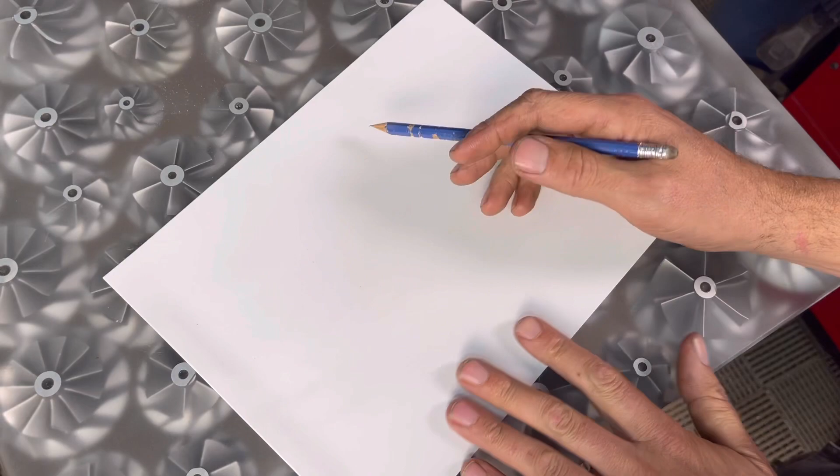Check out all their videos because there's a voting for the best fantasy knife at the end of this competition. So to begin this build, I like to do some drawings, maybe think of a design, something fantasy related. Let's get right into it. I have some paper here and I'm going to do some preliminary sketches to get an idea of what I want to make.

Now, when I think of fantasy, I'm thinking more futuristic, something that you might not see in a regular knife, or something more like what's seen in a movie, because they can digitally edit it and make things that cannot be made a reality to your eyes, basically.

So with that kind of thought, I want to make something that's kind of a dagger, probably a dagger type. The dagger seems to be one of my favorite types of knives. And I want to make it so something can come out — either I have a blade or something that can swing out, or maybe even a blade on the side that can fold in, or maybe even a bigger blade.

That being said, it would be a little complicated because there has to be some sort of mechanism inside that would help push those blades out. Now, I'm not even sure if I can do it — I'm just kind of getting my head wrapped around it.

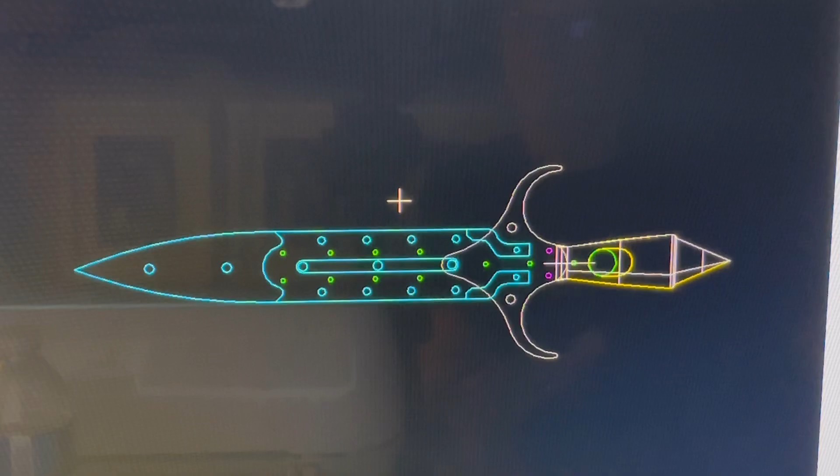If you look at it now, I have these in different colors here. Here's the handle, something I'm thinking about. The actual blade is going to be split in two because I need to put a mechanism inside there, and I'll just open up where the teeth are and the rack.

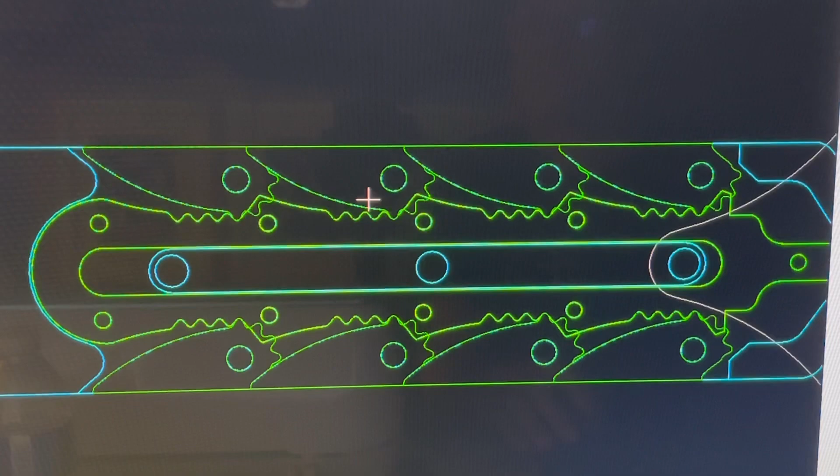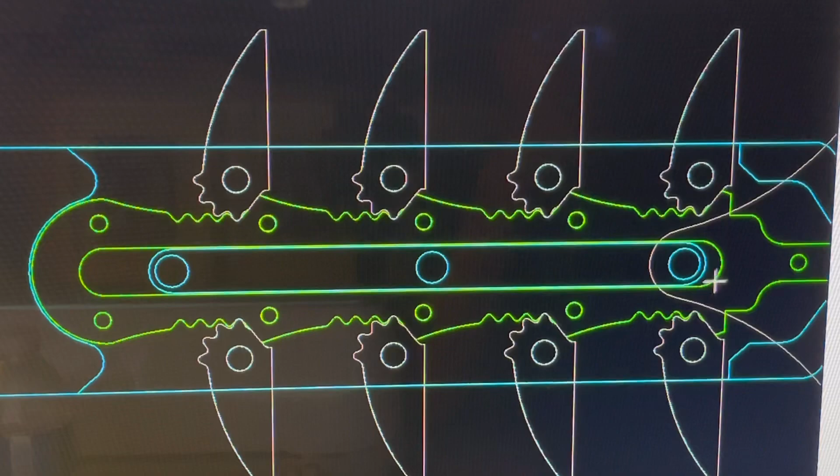Let's look at this mechanism here. You can see I have these gears, or teeth, that are going to make those teeth open and close. I'm going to just open up the right ones. Okay, there they are. So I have these teeth that once this mechanism gets pulled back, somewhere in the handle, or pulled forward, it's going to open up the teeth, and once pulled back, it closes the teeth, or the blades, these 8 blades that are on the side of the knife.

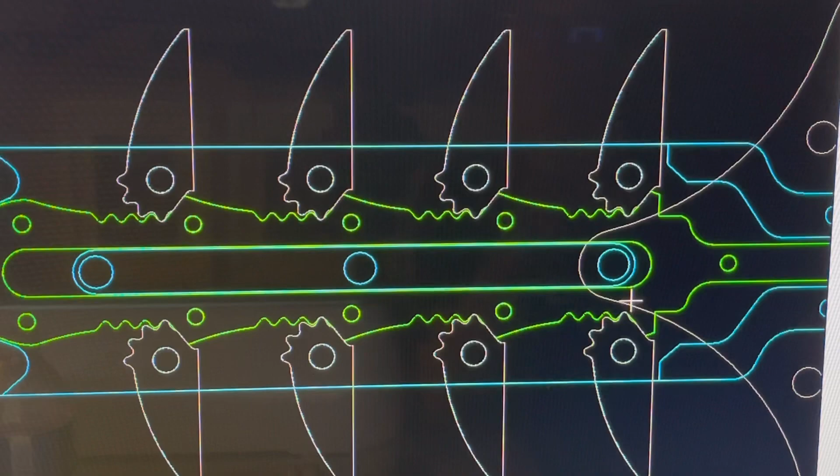Now they have to be thin. This rack that's holding it has to be pretty precise, because it's going to be operating all these gears here, so it has to mesh together. That's another reason why I draw it on here, and I can also take it all apart into different pieces.

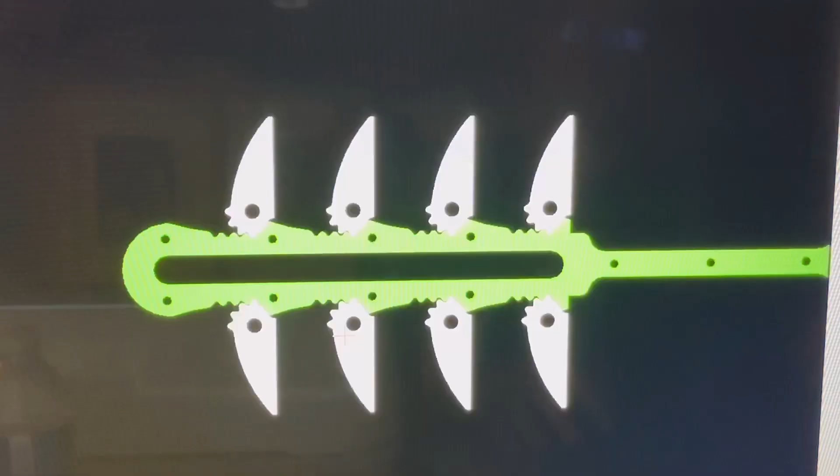Let me just show you, I'll take this off. So now it's in 3D view, and I can move it to a certain degree. I can scale it, and the best part is I can print it out and try it. So the first thing I want to do is make sure that the teeth and those gears are actually going to work when I open and close it. I'm going to print that first, and after that works, I'll print the whole mechanism and the knife together so I can have a good idea of how it's going to work and look.

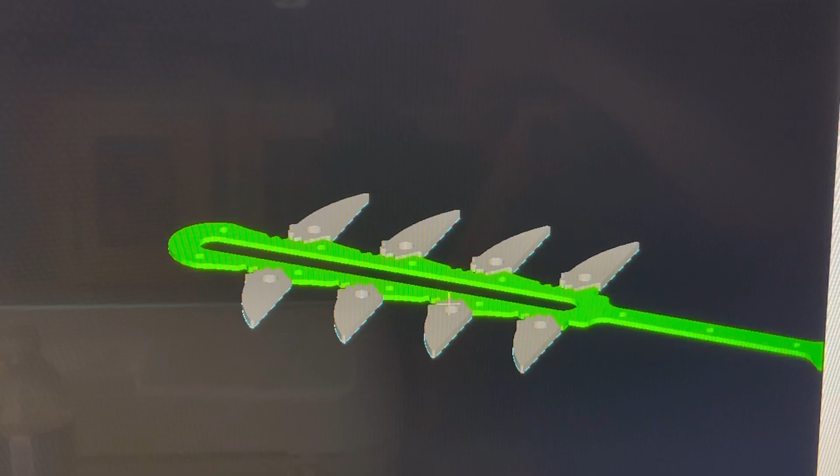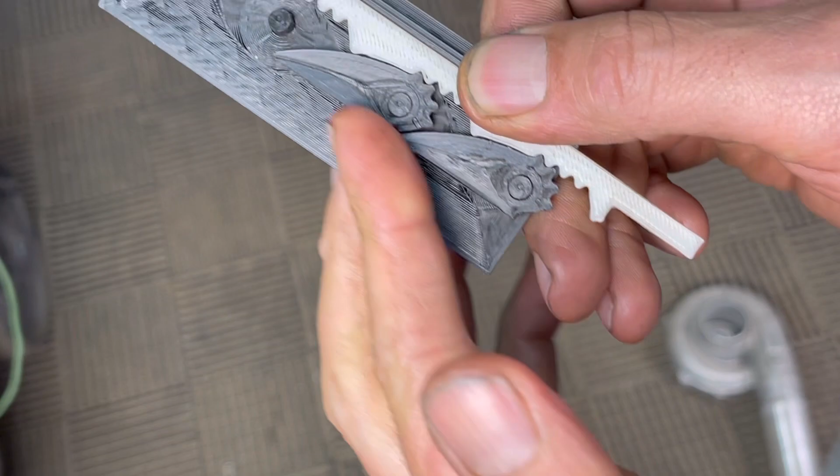All right, so this is the first print I made to make sure that the rack opens and closes with the teeth. It's basically just a simple design. It's going to close the teeth like that, so they will be along the side, nice and straight, hopefully. And when I push open, they actually lock into place, right inside there. So I'm hoping this is going to work. This print lets me know that the gears and the spacing and everything is going to work.

So now I'm going to print up a larger model, one of the whole knife and the blades inside, so I can use it as a template when I start making my Damascus.

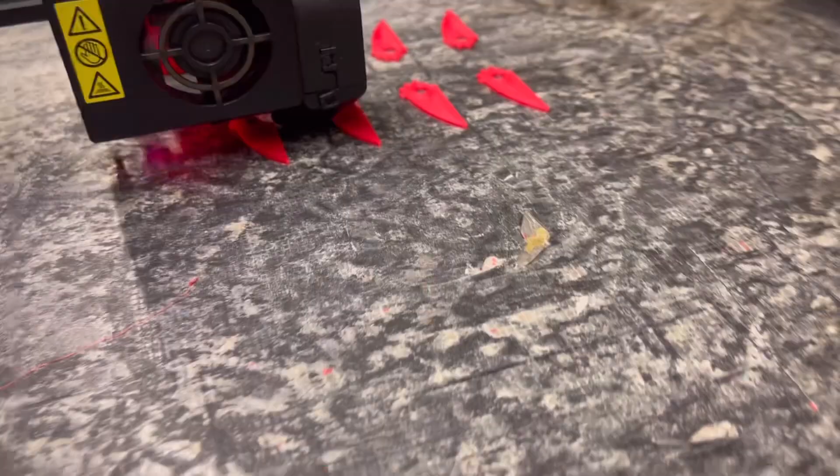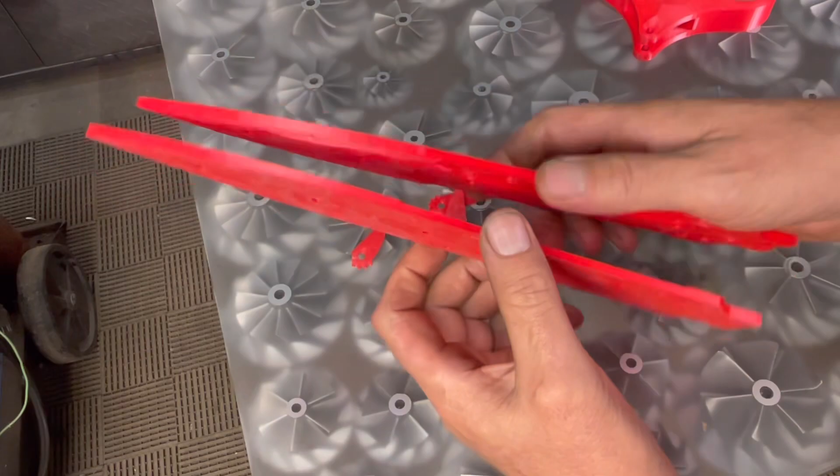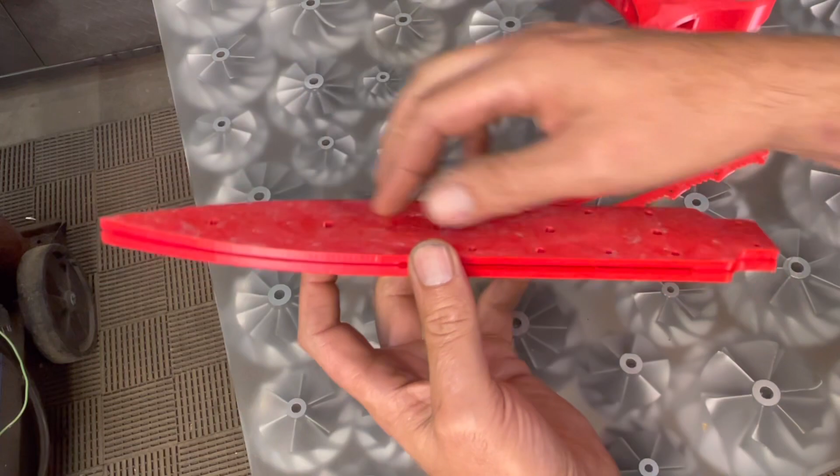All right, so here are the parts for the knife. You can see there's going to be 2 separate pieces, because that's the only way I can get these gears and the rack and everything inside here so they can have movement. My idea is basically to make 2 pieces, 2 billets or 2 blanks, and put them together. I'm going to machine them, grind them, and then once it's all together, I can shape the outside and shape the blade and stuff like that.

I'm going to use these holes to fasten it all together. Now I'm not sure if I'm going to use screws or a special fastener, or just put brass in there or copper and peen it over.

Let's see, here's the rack, so that's the full rack there, and it's going to slide there. Inside here, it's guided by that center section. Again, these are the blades, and they're going to go somewhere like that, and they're also going to have a little shaft that goes inside there that hopefully I'm going to make out of brass or copper, and then I'll peen that over too, and hopefully that works.

But that's the basic concept. It's giving me an idea of how much I have to cut. They're about a 1/16 inch in thickness, the rack and all these blades, and then it will fit together.

And then I kind of designed a guard that I can make in 2 pieces, because I needed to hold this whole thing together and the handle. I also have this that needs to freely move in between everything, so it's a little different than your typical knife.

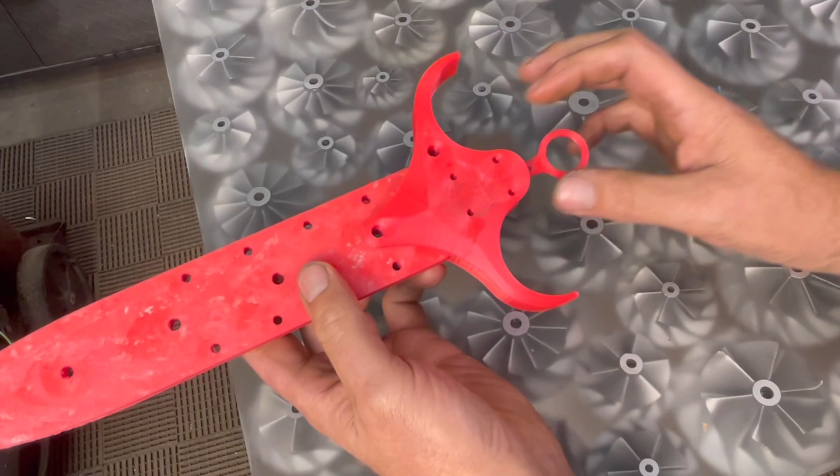So this would actually fit in there and hold all this together. It'd be held together by these fasteners, and the handle is going to come out from here, and hopefully I'm going to have a hole here that I can pull on to make it all work.

Okay, so now is, I think, the hard part. We are going to start making some Damascus, and I'm thinking I'm going to make a mosaic pattern. So I need to make it thick enough and big enough that I can split it in half and use it for 2 sides. So let's get on that part and start forging.

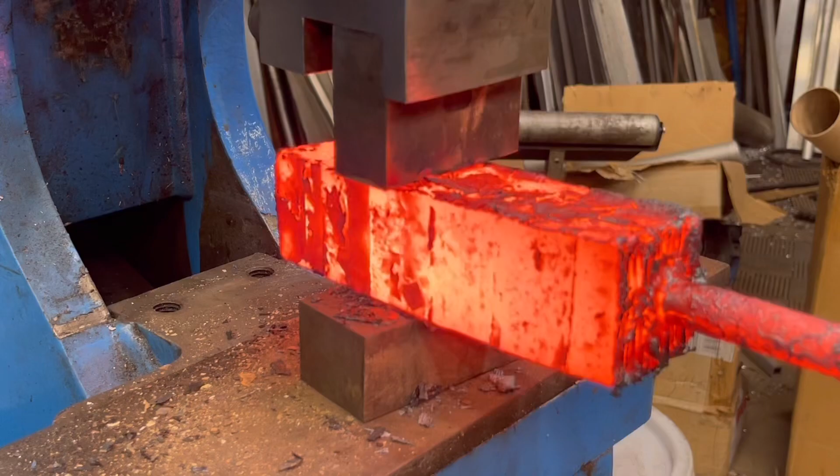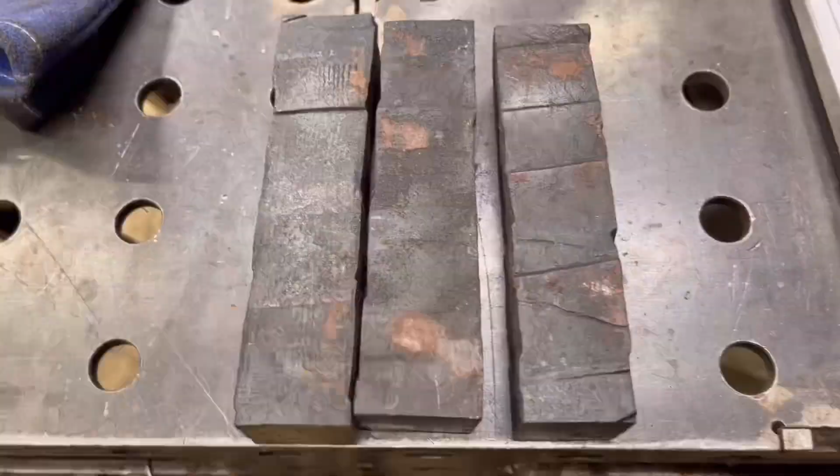Okay, so now I have them cut, and I have 3 somewhat equal sized pieces. You can see them there. What I'm going to do next is mill them square, take off that little bit of TIG welding, and give it a nice finish. That'll be easier for me to restack and forge weld it again. So let's get on the milling machine and mill it.

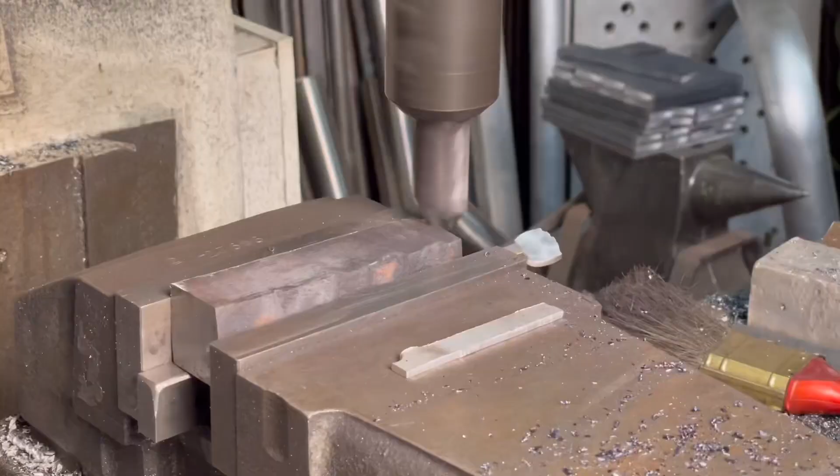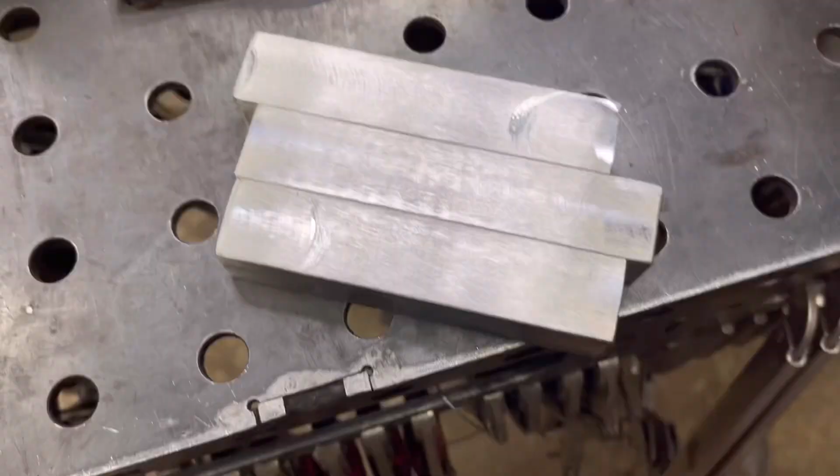Okay, so now I have the 3 pieces all machined square, and they're all the same size. After machining, you can see this is what we're left with, and the lines are going this way, and these are the other 2 billets. I rounded this one so it would fit tightly into that radius. So this one's going to go in there, and this one's going to go in there.

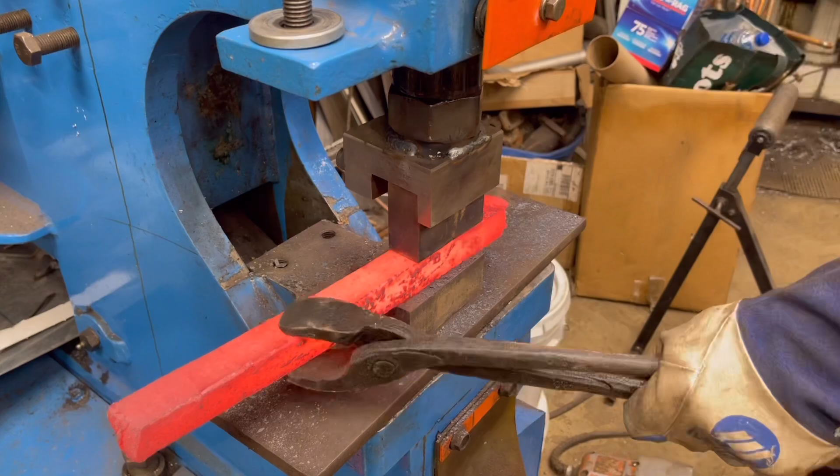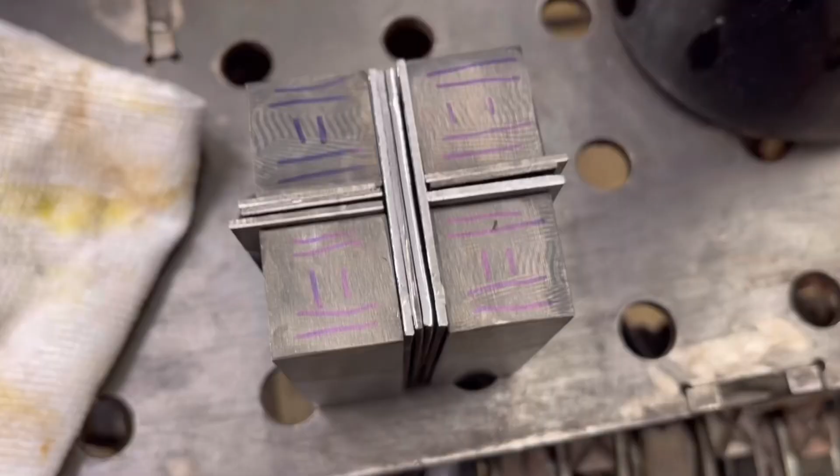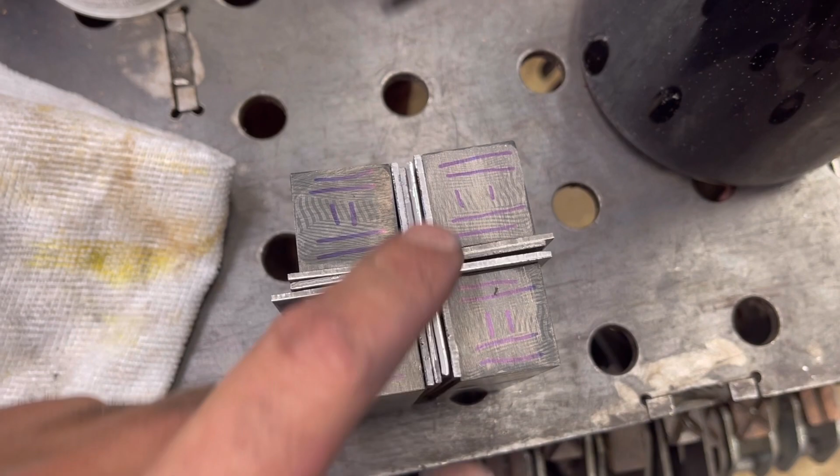Okay, here's the 4 pieces cut, and I rounded the ends. I'm just going to take a look at the pattern quickly, and then I'm going to put them on the mill and mill the outside again. So I have the pieces cut: 2 pieces of 1095, 2 pieces of 15N20, and I have to cut 1 more piece of each of these, same for the 1095. So it's going to have this bright line and a dark line in the middle. Cut 1 more piece and then weld.

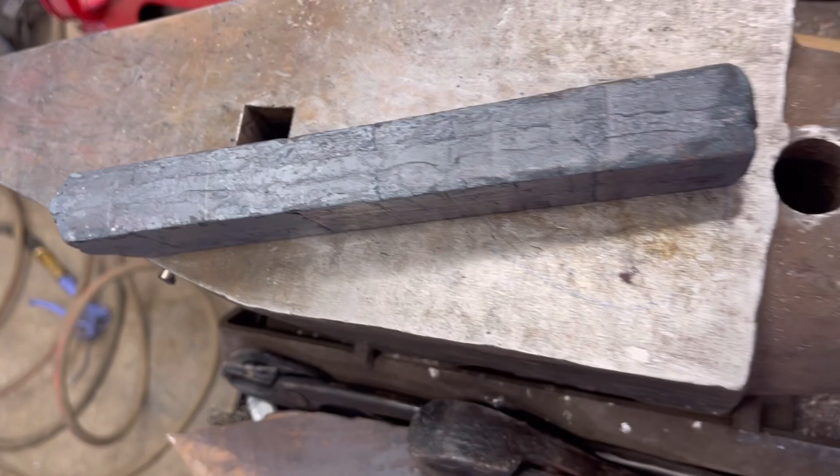Okay, there's the billet. I'm a little worried that I had some cracking in it, but we'll soon find out when I machine it. So fingers crossed.

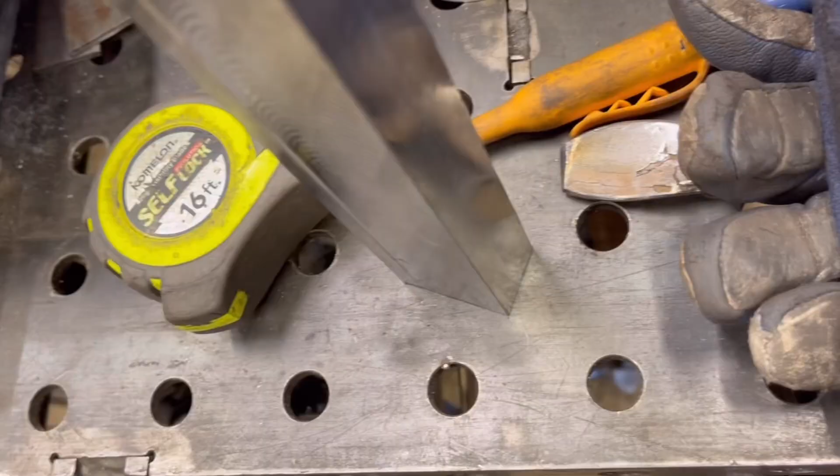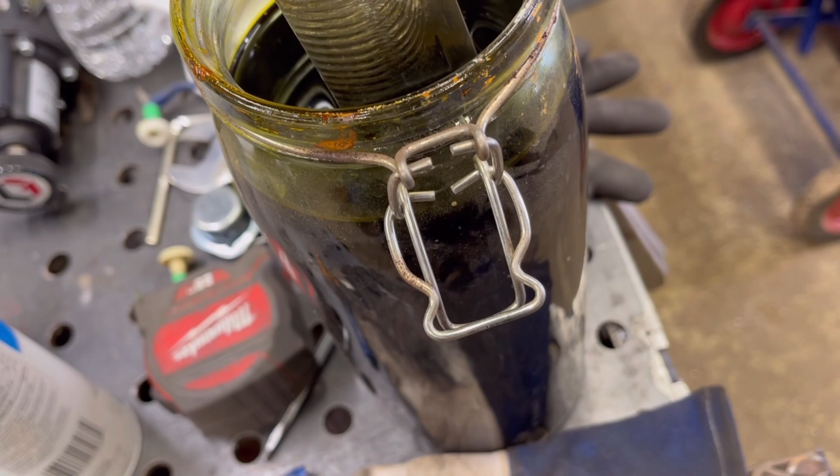Okay, so here is the billet machined. I'm going to give it a little bit of a test edge on the end. Just putting my gloves back on because it is hot. Cross your fingers, let's hope it looks half decent. Okay, let me just clean it up so I can see it a little bit better.

So I've been running the forge for about 3 days, going through this mosaic Damascus. But unfortunately I think I have a small crack in it, and this is going to be the 4th forge weld. I'm worried that when I forge weld it or draw it out to the billets or blanks I need, there's going to be a giant crack or something. So for this contest, for this fantasy knife build, I just can't take that risk.

At the same time, I also forged some feathered Damascus, so I think I'm going to just go ahead with that because I think it's really good. If I get stuck later on, I can always draw on this mosaic Damascus, which looks good, but I know when I did this last forge weld it had a little crack inside the middle there, and I just don't want to take that chance. So unfortunately we can't use that for this. We're going to go ahead and use the feathered Damascus.

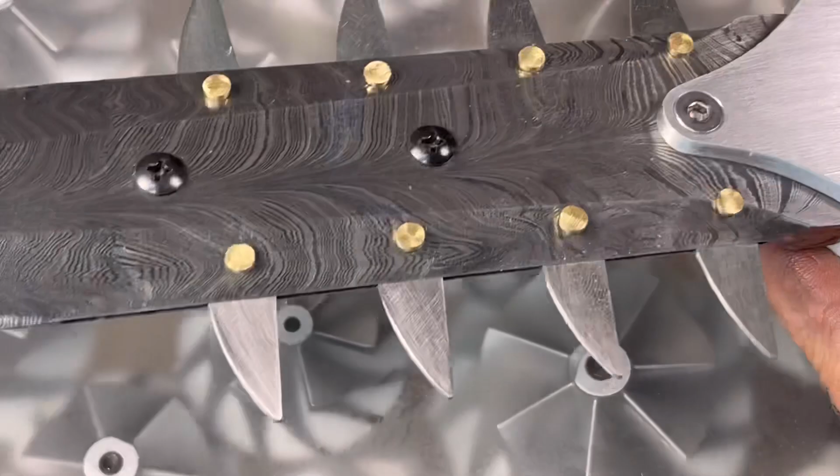Check it out. Listen to that clicking. Nice. Isn't that awesome? Now the best part of this is they stay down, so if it goes into something, it's going to be like a barb.

So there it is, the knife came out good. It's all done, works great. And yeah, pretty heavy, and that's because it's abnormally a lot thicker than a normal knife, because I have all these gears and that mechanism, that rack and everything inside here. And again, I'm going to be showing a little more in depth detail on this knife in the coming weeks.